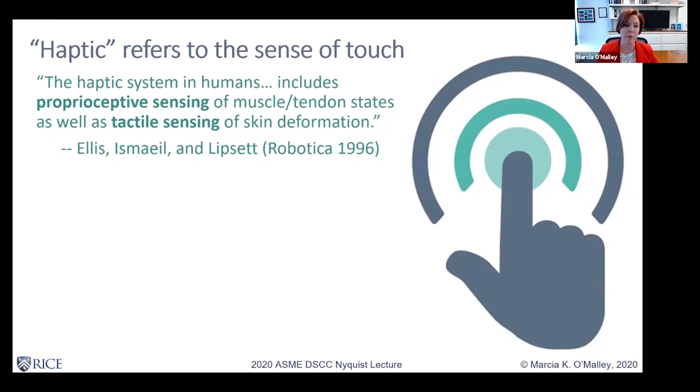They went on to note the potential that haptic interfaces presented to the broad field of robotics research, stating, and this is a quote, "One intriguing theme in robotics research is the construction of a haptic interface, a device that can sense human operators' hand motion and actuate the operator with forces or torques without significantly impeding the hand motion."

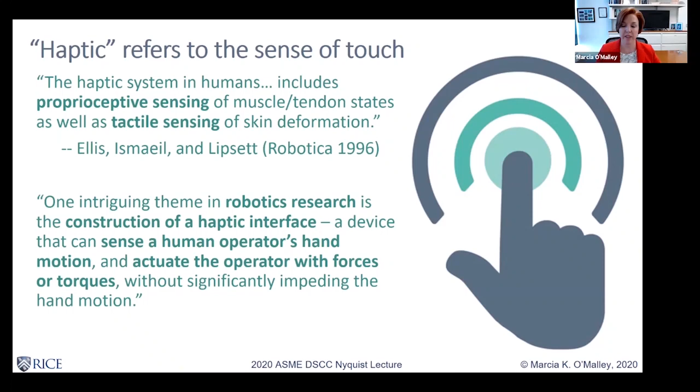Touch is often overlooked in our current computer interfaces, though more and more portable and wearable devices are incorporating haptic notifications. Perhaps the current pandemic has made you realize the importance of touch interactions, be it a fist bump, a handshake, or a hug. Our sense of touch is unique among our senses. It gives us a bidirectional way of interacting with our environment.

We see hummingbirds in flight, we hear a beautiful symphony, and we can taste the delicious flavors of freshly picked berries. But these senses are unidirectional. When we see, taste, or smell, we don't change our environment, we only experience it. What's interesting about touch is it's bidirectional. The earliest realizations of haptic kinesthetic interactions came in the form of flight simulators, which sought to recreate the dynamics of aircraft behavior and study pilot-induced oscillations.

So in the late 1980s and early 1990s, the dynamic systems and controls community was advancing a new field of research, built in part on the foundational work of Neville Hogan and his 1985 publications in the ASME Journal of Dynamic Systems, Measurement, and Control. You might be familiar with these papers. The focus was on the design and control of devices that enable humans to interact with virtual and remote environments.

It just so happens that while Neville was busy working on his impedance control papers, a couple of MIT graduate students, both under Hogan's advisement, were forging lifelong friendships as they carried out their PhD research.

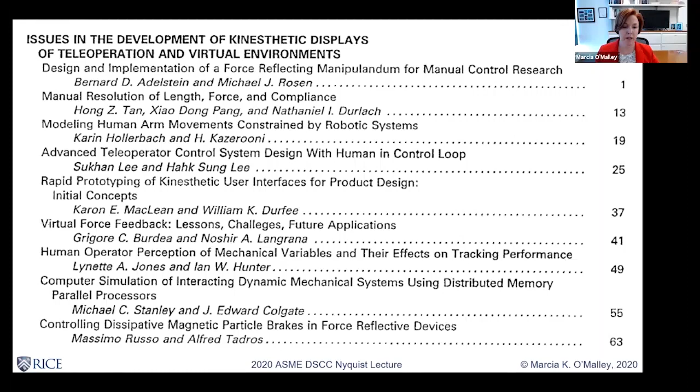Ed and Dov had so much fun organizing that 1992 session that they did it again in 1993. This year, they got nearly double the papers, broader participation, and they changed the title of the symposium. This is the first appearance of the word haptic related to technical sessions at the ASME Winter Annual Meeting. It was called Haptic Interfaces for Virtual Environments and Teleoperator Systems.

Still, the session focused on areas that were core DSC topics, like hardware design and evaluation and stability, plus the interdisciplinary aspect of haptics was present, again, highlighting research trends that are hot still today. For example, there's a paper about human operator adaptation to machine instability, which is a very common topic that we're still addressing in physical human-robot interaction.

There was a presentation by Michael Goldfarb, who happens to be my PhD advisor, on the design of wearable orthoses for applying loads to lower limbs, precursor to the burgeoning field of rehab robotics and exoskeletons. And there were papers on novel materials and actuators, shape memory alloys, for providing tactile feedback.

So fast forward 3 years, and I would attend my very first ASME Winter Annual Meeting, my very first haptics symposium as a first-year graduate student at Vanderbilt. This was my introduction to the DSC community, and I instantly saw the influence that all aspects of our field were having on the growing research in the field of haptics.

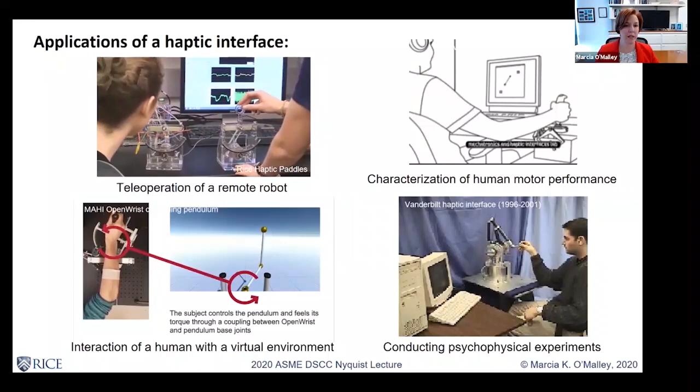Anyway, characterizing human motor performance where we simulate complex dynamic systems to be manipulated to achieve some goal. It was also envisioned that a potential application of a haptic interface might be for conducting psychophysical experiments on haptics. This was a significant focus of my own PhD work done at Vanderbilt with a custom 3 degree of freedom haptic device shown in the bottom right of my slide.

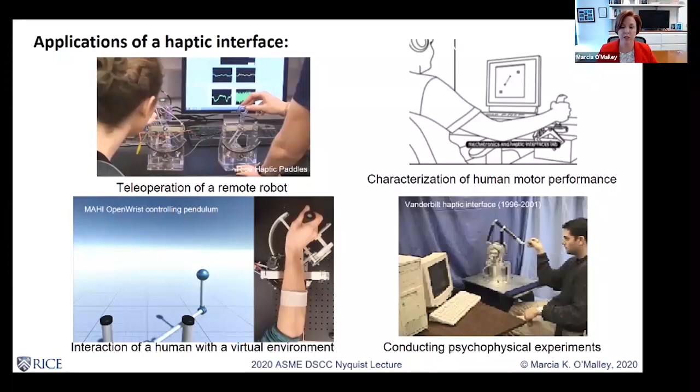And finally, interaction of a human with a virtual environment can be enabled by adding haptics, allowing the user here to feel forces and torques for a task of swing up of a pendulum using our MAHI OpenWrist.

This paper also identified specific application tasks for teleoperation, including handling materials in hazardous environments and remotely operating in an environment in which safe human presence is expensive to achieve and maintain. So I demonstrate this with a slide featuring a space teleoperation system developed by the European Space Agency. This is the ACTOR Advanced Teleoperation Control Station and LWR and Task Board work cell.

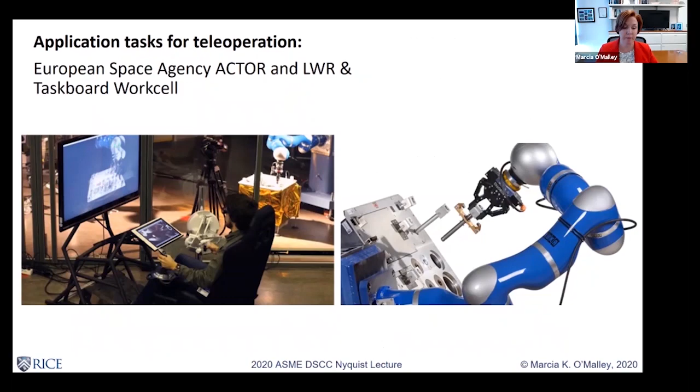And finally, another application task for teleoperation was identified as amplifying or reducing human scale motions and forces. The Da Vinci surgical robot that I'm sure you're familiar with from Intuitive is one such system that can filter tremor and magnify human movements to enable precise surgical procedures.

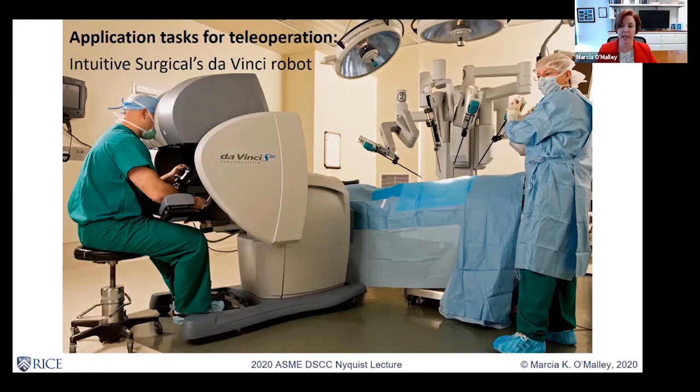So all of these applications share the requirement that the operator be as unimpeded as possible in motion while they're holding the device, yet be provided with forces and torques that are of high fidelity. So as I'm moving around in my virtual environment, I want free space to feel free. But when I come in contact with virtual objects, I want them to be as crisp and the forces to be as high as possible to make it feel like a physical environment that I would experience in the real world.

Ellis et al. went on to identify the following list of design objectives for any high-performance haptic interface: low apparent mass and inertia, low friction, high structural stiffness, backdrivability, zero or at least very low backlash, high force bandwidth, the absence of mechanical singularities, high force dynamic range, compactness, and an even feel through the workspace.

These guidelines, while often conflicting and difficult to achieve, led to the use of stiff and lightweight materials like carbon fiber, the development of lots of parallel manipulators as haptic devices, the use of capstan transmissions that are backlash-free, and novel control approaches, all of these realized over the next 2 decades of haptics research.

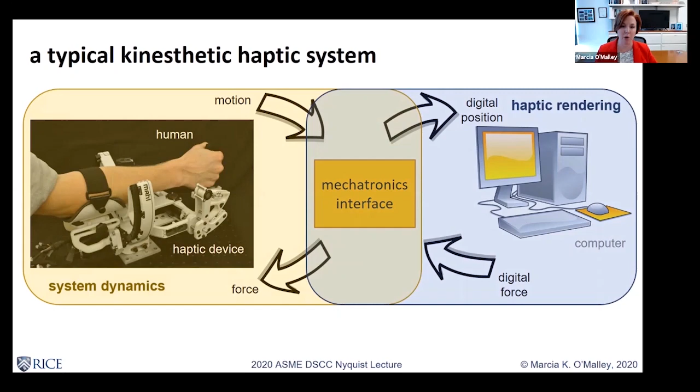This system has two primary subcomponents. The mechanical device, human, and mechatronics interface contribute to the physical system dynamics, and the mechatronics interface together with the computer perform the haptic rendering based on pre-programmed algorithms. So when we couple a human to a robot device, it is important to ensure that the overall system behavior is stable. Often we use passivity, a more conservative requirement, to analyze haptic system stability.

So why do instabilities occur? Well, when we're holding on to this haptic device, if we were interacting with the real world, we can only approximate those in the virtual world, right? So real world interactions are only approximated in the virtual world by our computational models. And although our approximation errors are small, their potentially non-passive nature can have profound effects on that physical experience that the user has. So consider a haptic device, and we'll model that haptic device to have some mass and inherent damping. And that haptic device is rendering a virtual spring of stiffness K.

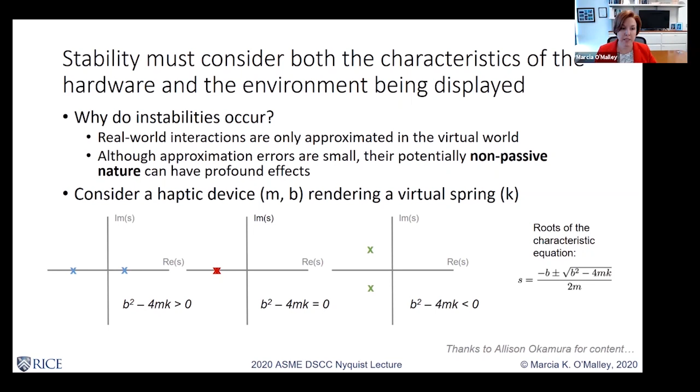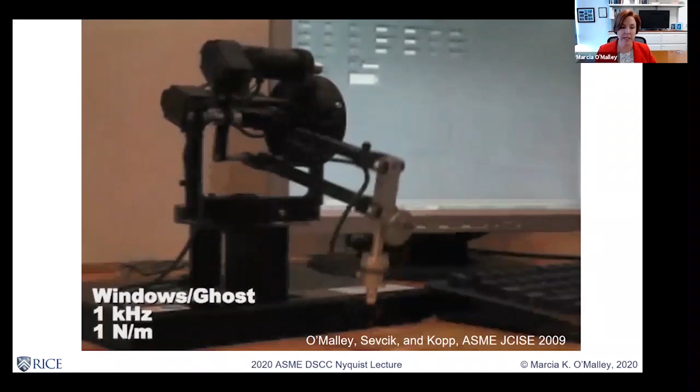And the result is not always pretty. So here's a Phantom Premium that's rendering a virtual wall with a stiffness of increasing values. That's 5 newtons per meter now. And you can see that once we reach a large stiffness, in this case 100 newtons per meter, then we get an unstable behavior of the haptic device bouncing on the virtual surface. And then the graduate student has to intervene.

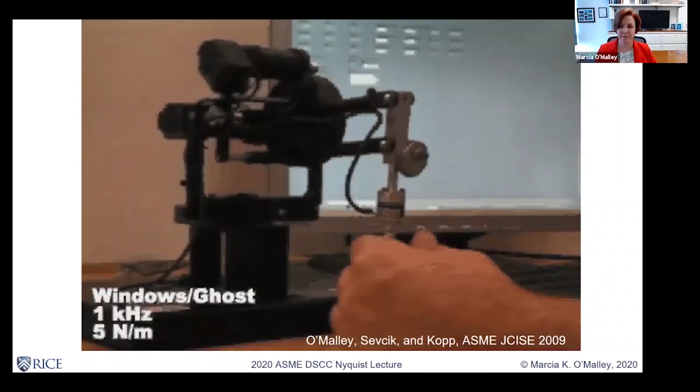So let's remember what Ellis et al. told us. We have these objectives of low apparent mass and inertia, low friction, high structural stiffness, backdrivability, zero or very low backlash, high force bandwidth, the absence of singularities, high force dynamic range, this even feel through the workspace. All of this is often represented by examining what we call the impedance width, or Z width, the dynamic range of impedances that can be rendered with a haptic display while maintaining passivity.

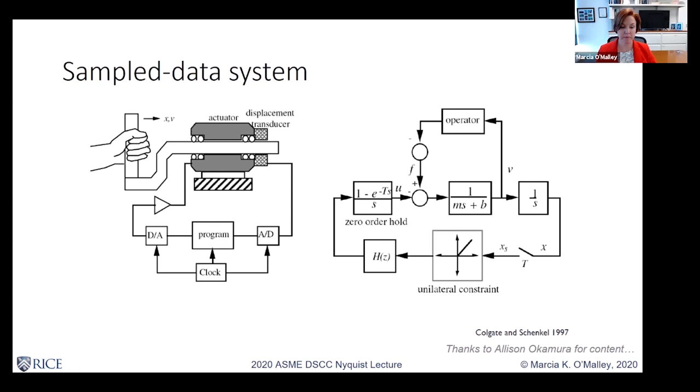So in 2008, Weir and Colgate showed that a necessary and sufficient condition for passivity is that the physical damping of the device must be greater than this function of sampling period, the frequency of the input motion, the virtual environment to be rendered, and the Nyquist frequency.

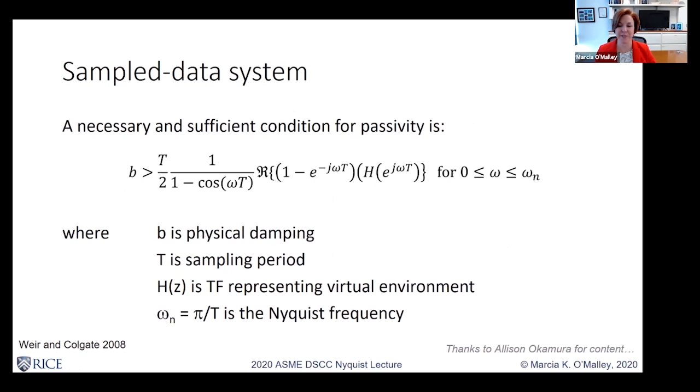Did you see that? I had to mention Nyquist frequency in my Nyquist lecture. All right, task complete.

So they went on to show in this paper that if the virtual environment is a virtual wall with some stiffness K and damping B, represented by the discrete time transfer function H of z, assuming that the velocity estimate comes from a backward difference differentiation, then the requirement on passivity is that the physical damping of my haptic device b must be greater than the virtual stiffness K times the sampling period T over 2 plus the absolute value of the virtual damping B. So with this work, we now had a straightforward way to ensure stable interactions between our users and our virtual walls.

And it is clearly a function of the physical device, the haptic device itself, this lowercase b being the fact that this physical device needed to have some inherent damping to ensure passivity, the computational implementation implied by the sampling period T, and the parameters of the virtual wall, capital K and capital B, that we wish to render.

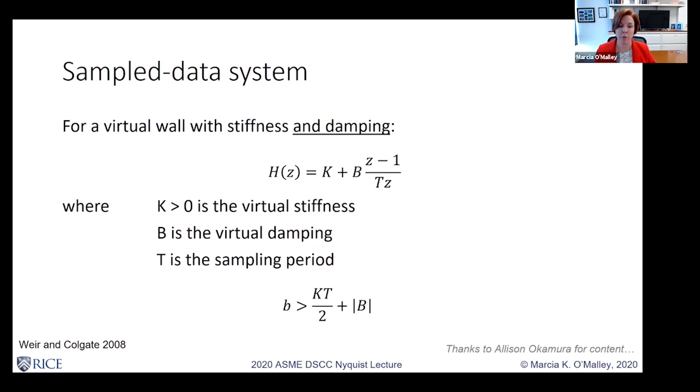Abbott and Okamura further extended this work to show that the maximum virtual stiffness must be less than the minimum of 2b over T, where b is the device damping, T is the sampling period, or 2fc over delta, where we might have some friction and we have sensor quantization, the quantization of position due to an encoder.

Because many haptic devices have high resolution encoders, the sampling rate can still be a limiting factor. So we go back to this equation. The limiting factor could be the delta, the quantization of the encoder position that we're sensing, or the limitation could be the sampling period T.

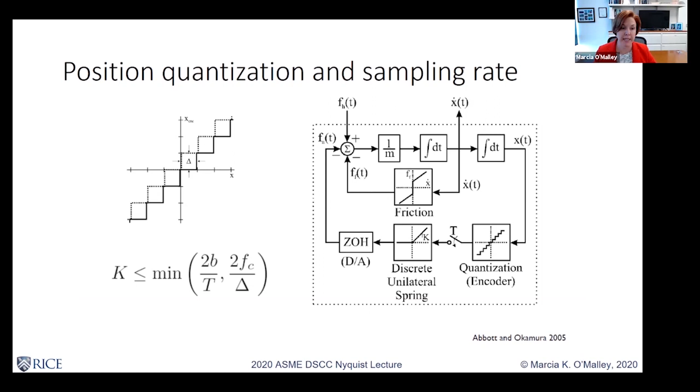As before, in this video, we increase the stiffness of a virtual floor until instabilities are induced. This is first implemented with a sampling rate of 1 kilohertz. Then we show that the computational platform can be improved.

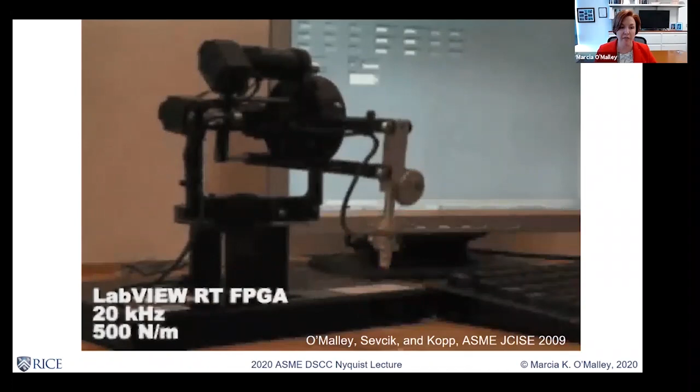Here we used FPGA to render a virtual wall with increasing stiffness at a sampling rate of 20,000 hertz, 20 kilohertz. This allowed us to significantly increase the virtual wall stiffness that could be stably rendered. So now we're at 100 newtons per meter, and we can even extend well beyond that to 500 newtons per meter, which is well beyond what we were able to implement with only a 1 kilohertz sampling rate.

In my own lab, we've also looked at computational methods for determining endpoint velocities and how this can affect Z-width. If we want to implement a virtual wall that has both stiffness and damping, we're measuring the motion, the position of our haptic device, and often we're computing the derivative in this sample data system. Finite difference methods often require filtering, which can introduce delays.

We explored the use of Levant's differentiator to extend Z-width compared to finite difference methods in this work back in 2018 with two of my former PhD students, Vinay Chawda and Ozkan Celik.

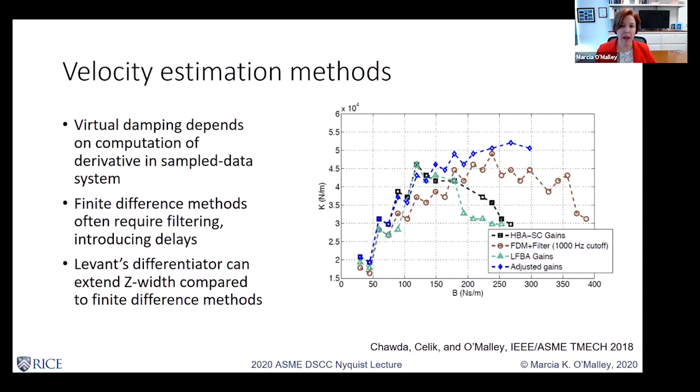So one approach is to look at the physical hardware itself. We can design our hardware in a particular way, or we can modify our hardware, perhaps by adding damping, either physical or virtual. We can improve the encoder resolution or increase the sampling rate, or we can improve velocity estimation techniques. All of these will improve the Z-width or the range of impedances that I can display with my haptic device.

Now, due to time limitations with my talk today, I can't go into other methods, but it is also possible to improve your Z-width with control using passivity observer and passivity controller techniques or prediction compensation techniques, or you can reduce your virtual environment impedance and fidelity to stay within a safe range.

This approach, while it sounds sort of counterintuitive, why would you want to decrease the fidelity of your display, actually takes advantage of the limits of human perception to create illusions of higher performance with visual feedback or other tricks that can fool our perceptual ability. So we can maintain stable interactions through the physical interplay, the touch interactions, but use visual feedback to fool the user, to play off their perceptual limitations and increase the apparent fidelity of the system.

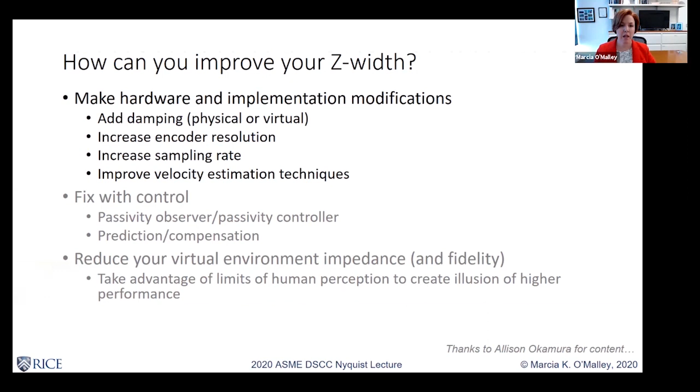So let's sort of travel back in time again and recall that in parallel to this fundamental work on the design and control of haptic devices, researchers were beginning to explore how to use such devices to rehabilitate motor coordination following stroke. So this slide shows two different devices for upper limb rehabilitation. On the left is the MIT Manus. This is an impedance type haptic device. And on the right is the MIME, which was actually a Puma industrial robot, a Puma 560, which was converted to be used as an admittance type haptic display.

There's a 6-axis force torque sensor at the interface between the patient's forearm and the end effector of the robot. And so you could use force sensing of the user's motion, control the position of the robot to implement different rehabilitation scenarios or movements. This enabled an individual with stroke to interact with physical objects, even if they had decreased motor function, or as in the case of the MIT Manus here, allowing a user to do virtual rehabilitation tasks through the Manus device.

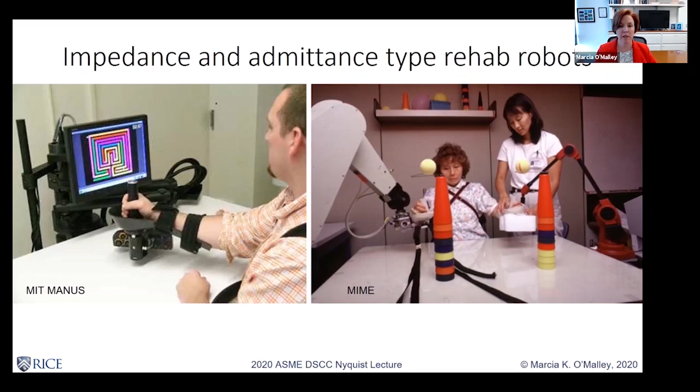Starting in the early 2000s, work on rehabilitation expanded, and researchers started looking at not just how haptic devices could be used to rehabilitate those with motor impairment, but how haptic devices could be used to train new motor skills. And this has been a significant area of focus in my research lab at Rice. Haptics has long been recognized for its potential in virtual or augmented training applications, and there's strong evidence that haptics can enhance performance of dynamic tasks performed in virtual reality.

In my group, we've been developing haptic devices that can guide users to learn new tasks, especially training with haptic feedback in virtual environments. We're also in the early stages of translating our methods to training for endovascular surgeons using robotic platforms. I'll share with you one example of how the physical interaction between the robot and the human can guide the human to improve task performance.

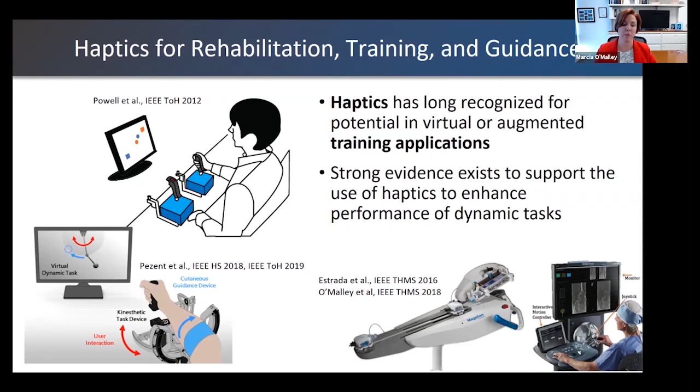In this work, we used an impedance type haptic device, our MAHI OpenWrist, shown with the handle on the right-hand side. And we compared different types of haptic guidance to see how they affected the user's ability to learn to control this double pendulum to follow a specific desired trajectory. Now, as the user interacts with the virtual environment, they're feeling the forces and torques of the dynamics of the pendulum through the haptic device.

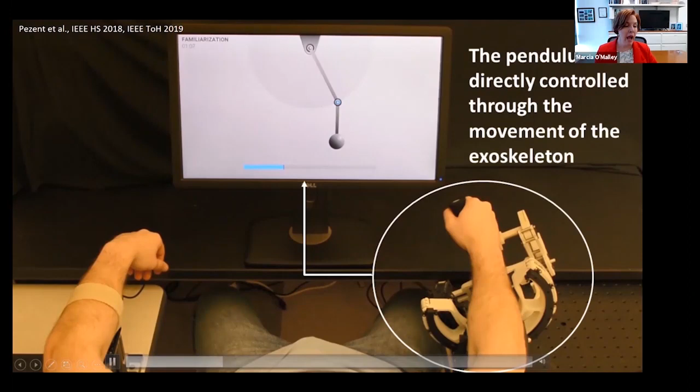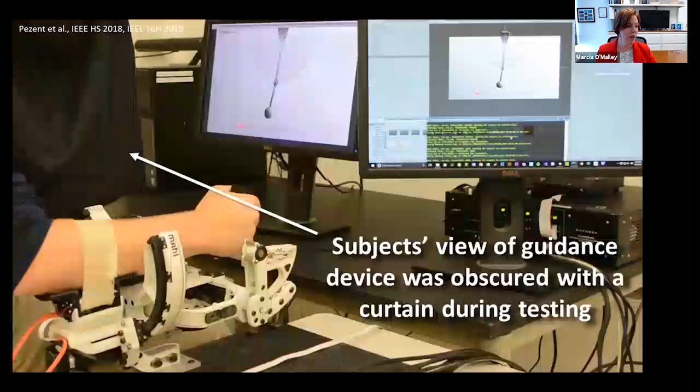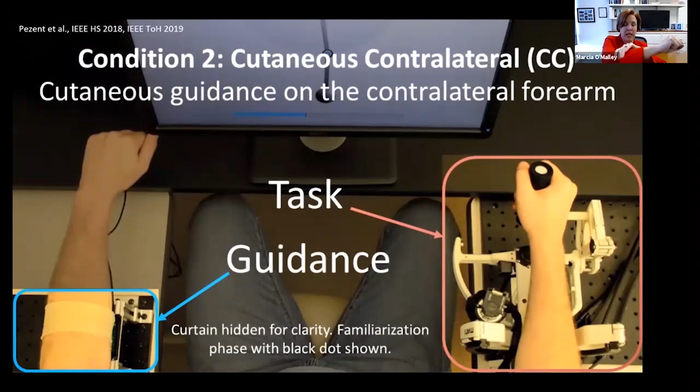And then we explored different ways to provide guidance to instruct the user to follow this precise desired trajectory, which is indicated with the black dot moving along the sphere. So we shielded the user's view of guidance and obscured it from their view. We looked at one condition where the guidance was provided on top of the haptic feedback they were feeling of the task. So as they manipulated the device, they were feeling the forces and torques of the pendulum, but they were also feeling cutaneous cues with this band around the forearm that would show them how to steer the haptic device to achieve the desired trajectory.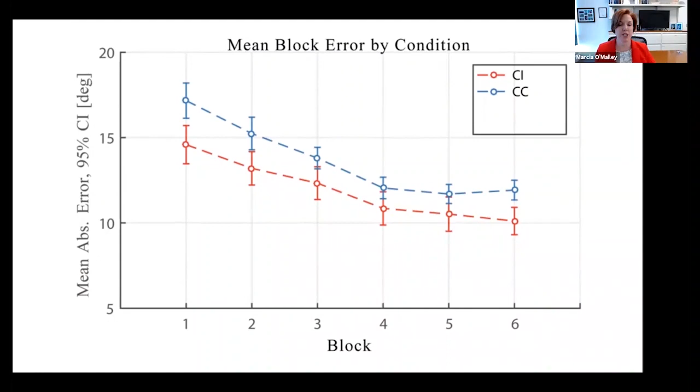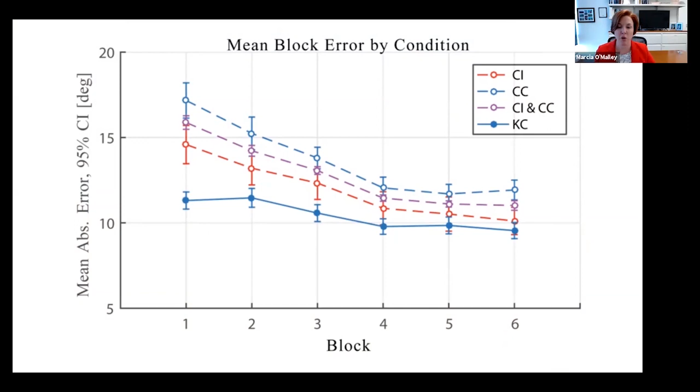In a second condition, we put that steering cue on the contralateral arm. And we also compared kinesthetic guidance provided with a second kinesthetic type impedance-based haptic device where the guidance forces that are showing them how to steer the joystick are provided on the left, and they're feeling the task dynamics of the double pendulum on the right-hand side. We found that using this approach, performance improved with haptic guidance since the user could feel the task dynamics and they could feel how they should change their control of the 3D joystick to more accurately track the trajectory.

So we used our 3 degree of freedom haptic device, the Mahi open wrist, which is impedance controlled, to simulate the dynamics of that double pendulum trajectory following task. And by tracking the user input and providing intuitive haptic feedback based on user performance, we provide guidance forces through the haptic device or through a wearable device, this cutaneous twisting band, to guide the user.

Now, there's a lot under the hood of just this approach as well in terms of different control algorithms, whether you provide disturbance forces to train new skills, whether you provide assistive forces that pull somebody along a desired trajectory, and also in the rehabilitation domain, how we can in real time model and adapt a model of a user's changing capability to adjust the support provided by the robot to achieve these movement goals. All of this is more than I have time to go into today, but I think you find it quite interesting to see, again, the fundamentals of dynamic systems and controls that are under the hood of these haptic devices, either to create these high fidelity virtual environments or to give us insight into how we might use the forces and torques from the haptic device to guide and manipulate the user to retrain skills or train new skills.

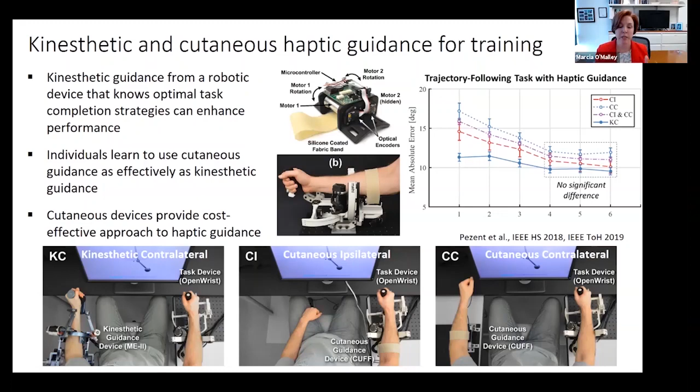So as my time is drawing to a close, I want to wrap up by proposing some of the emerging future challenges in the field of haptics that provide opportunities for our dynamic systems and controls community to contribute. So as you've heard, when I started in the field of haptics in the late 1990s, the focus was on the design of grounded haptic devices and rendering of kinesthetic type haptic feedback. These are the forces and torques that are experienced as you explore the world, touching objects, feeling weight or stiffness or compliance. Many of these early devices relied on a stylus as the interaction point between you and the virtual world that you were feeling, like exploring the world through dental tools.

A decade or so later, with the advent of tablets and smartphones, haptic research started to shift to focus on surface haptics, or how to convey textures and tactile sensations through the fingertip exploring the surface. This is done either by vibrating the surface to modulate the friction between the fingertip and the surface, or using electrostatics, or even using an array of pins that can be individually actuated to create a three-dimensional surface.

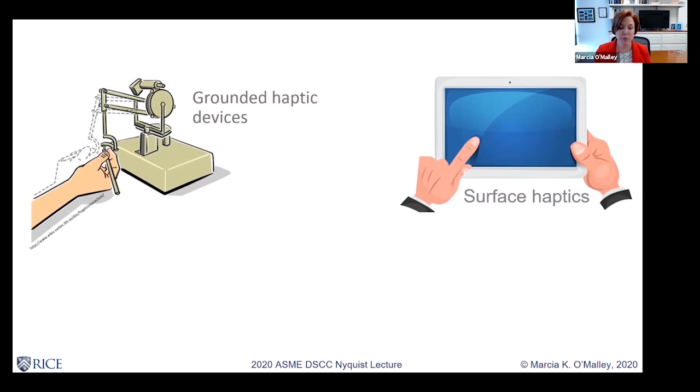More recently, we've seen an explosion in wearable devices, and more of these devices are providing haptic feedback. You might receive different vibration notifications indicating that you're receiving a phone call or that you should stand up and take a walk. My group, along with other groups around the world, is interested in enhancing the range and type of haptic feedback that can be provided with wearable devices so that we can move beyond simple notifications and use these for navigation and communication, conveying really information-rich messages through different types of haptic cues conveyed directly to the skin.

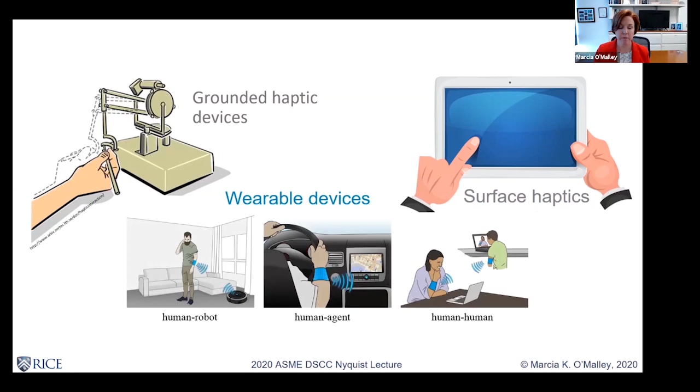With surface haptics, these variable friction devices, you can create the friction texture sensation through electrostatic vibration or ultrasonic vibration of the screen, but it's challenging to be able to do this with multi-touch. We can often do this with the finger at a single point on the screen, and we're just now seeing advances in haptics where multi-touch is possible, where you can get different effects at different points on the screen.

Another emerging area of haptic interactions is mid-air or in-air interactions, using ultrasonic or acoustic radiation pressure to actually generate touch sensations on the hand as it moves over an array of ultrasonic actuation.

Another challenge that's not illustrated in this slide is texture modeling. Our traditional kinesthetic devices don't have the bandwidth to accurately recreate high frequency vibrations. They're very good at sort of the low frequency vibrations when we come in contact with objects, but everything sort of feels like a thud. We want crisp interactions as if I was tapping on the surface. And that high frequency feedback is difficult to do with these traditional kinesthetic devices. They just don't have the bandwidth.